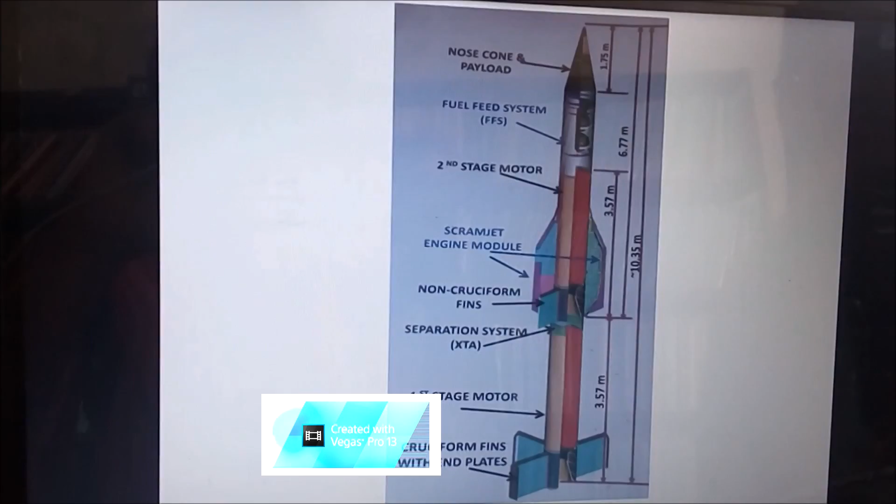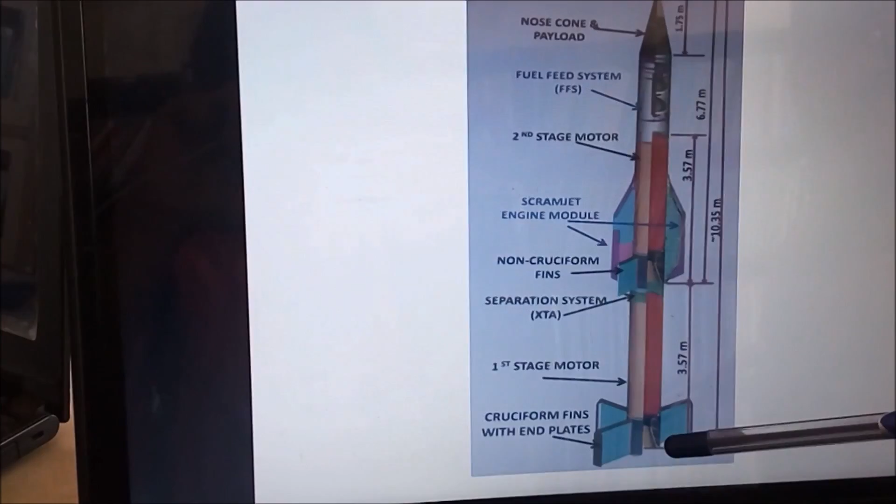The Advanced Technology Vehicle is a modified Indian sounding rocket developed by the Indian Space Research Organization. The first stage of ATV is called the booster and the second stage is the sustainer. Both the booster and the sustainer are provided with fins for aerodynamic stability. The fuel feed system is positioned above the sustainer motor, with the nose cone payload on top of the fuel feed system. The scramjet engines are mounted diametrically opposite at the end of the sustainer motor.

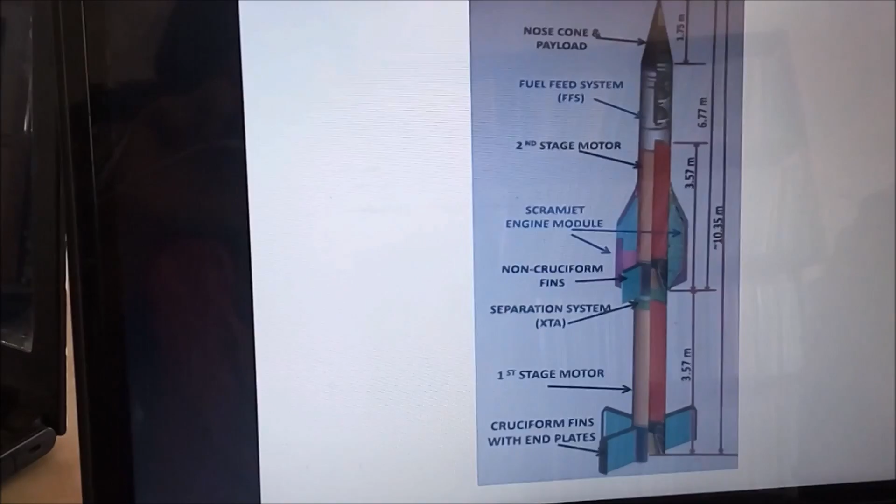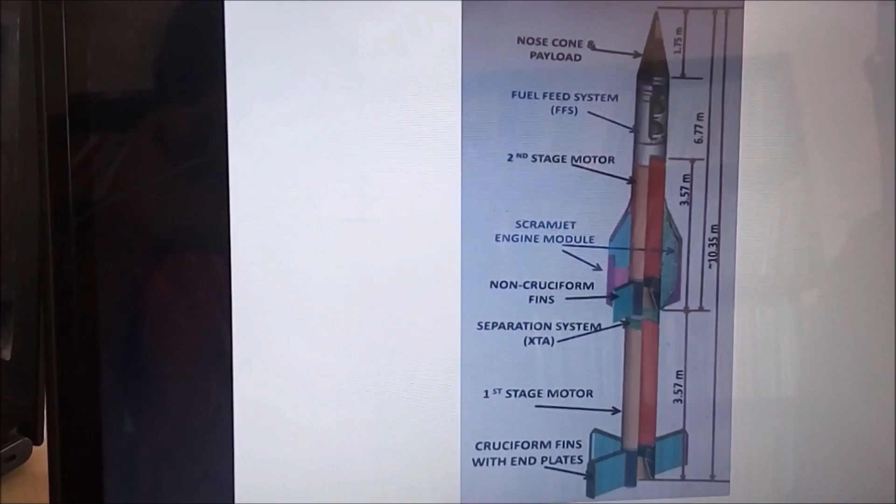Gaseous hydrogen has been chosen as the fuel for the scramjet engines. Air required for combustion is drawn from the atmosphere through the air intake system, and while passing through it is subjected to multiple oblique shocks which raise the pressure and temperature of the air. This facilitates auto-ignition of the gaseous fuel injected through the engine struts under choked flow conditions, into the hot air stream passing through the combustion chamber.

Even though auto-ignition of the fuel is expected to occur, as a redundancy, pilot igniters are also provided in the engines to ignite the air-fuel mixture in case auto-ignition does not happen.

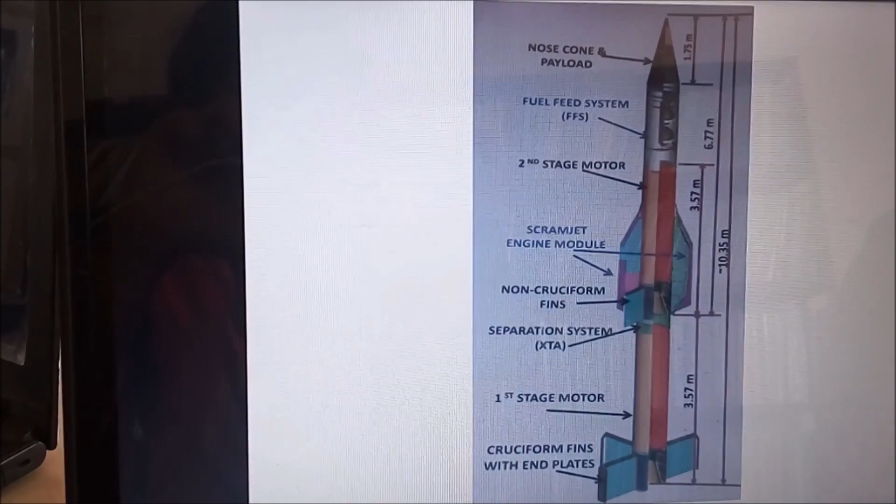The gaseous hydrogen feed system circuit consists of a gaseous hydrogen fill valve, used for charging the gas bottle to a pressure of 27.5 megapascals. A vent valve, similar in configuration to the fill valve, is used for venting the hydrogen gas in case of an emergency.

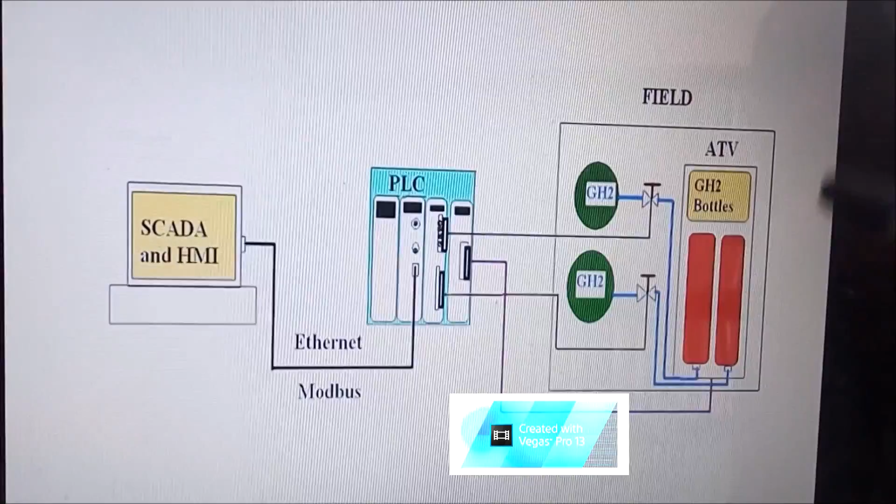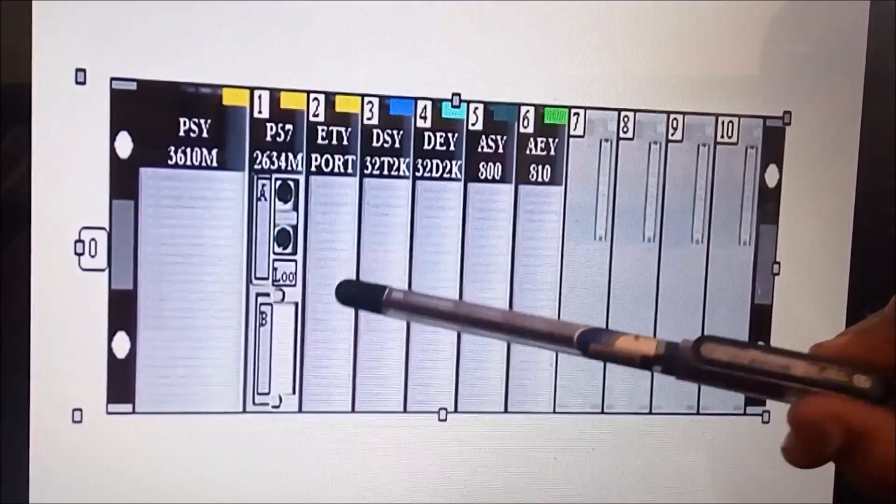This is the block diagram of our project. It consists of SCADA, PLC, and field equipment. The PLC used here is a Schneider Premium PLC. The hardware part of the PLC consists of a power supply, CPU, analog input card, analog output card, discrete input card, and discrete output card. All these components are inserted on a backplane.

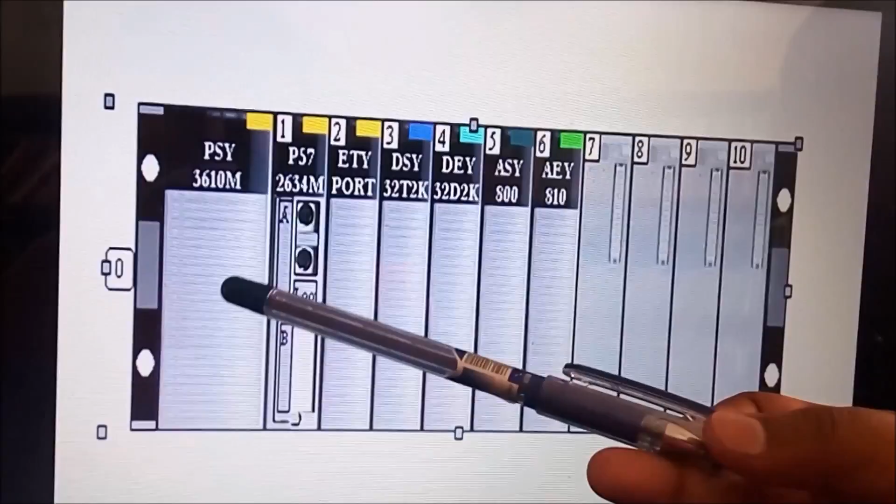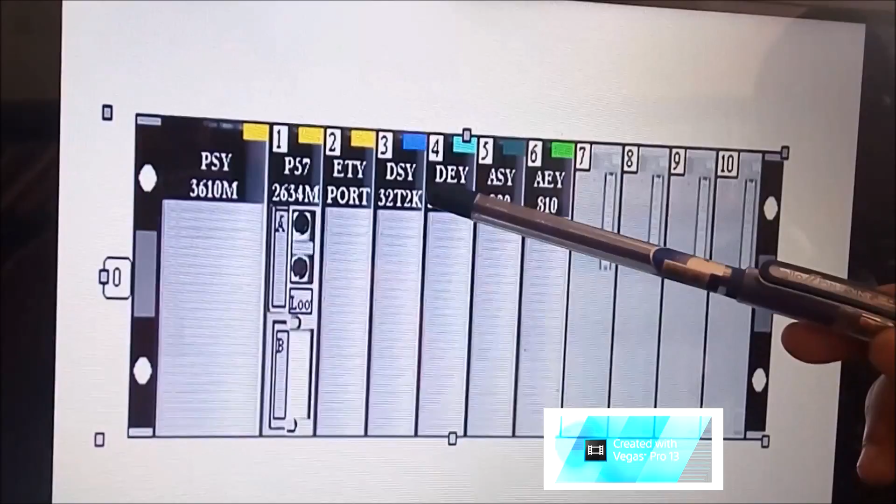PSY3610M is the power supply port, which uses a power supply of 24 volts. P572634M is the CPU. ETY port is the Ethernet port. DSY32T2K is the discrete output port. DEY32D2K is the discrete input port. ASY800 is the analog output port. AEY810 is the analog input port.

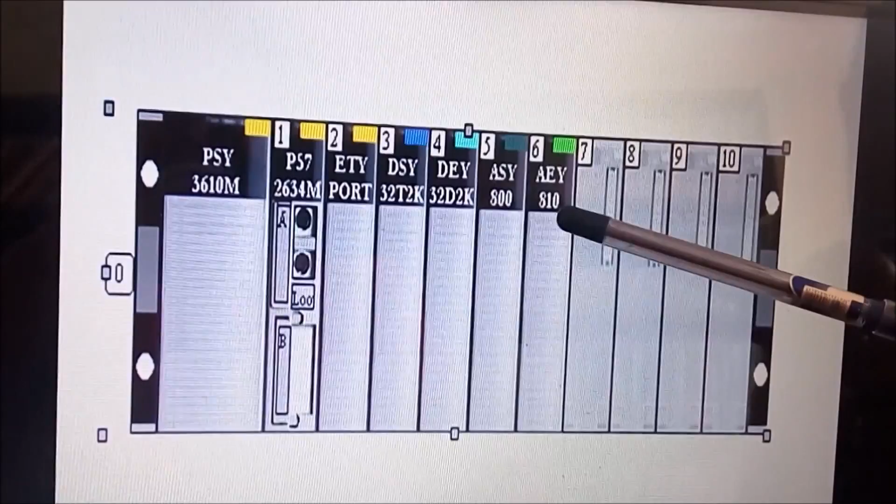What is a PLC? A PLC is an industrial computer that monitors inputs, makes decisions based on its program, and controls outputs to automate a process or machine. A PLC has a built-in operating system, highly specialized to handle incoming events in real time, at the moment of their occurrence.

There are many controllers for automation, but we opt for PLC because it is a digital computer designed for multiple input and output arrangements, for extended temperature ranges, immunity to electrical noise, resistance to vibration, and above all it can work under harsh conditions.

SCADA is an acronym for Supervisory Control and Data Acquisition. It is a real-time industrial process control system used to centrally monitor and control remote or local industrial equipment such as motors, valves, pumps, relays, etc. A SCADA system gathers information, such as where a leak on a pipeline has occurred, transfers the information back to a central site, then alerts the home station that a leak has occurred, carrying out necessary analysis and control such as determining if the leak is critical, and displaying the information in a logical and organized fashion.

We use Vijeo Citect software for SCADA, which manages and monitors the process in manufacturing, primary production, utilities delivery, and facilities management.

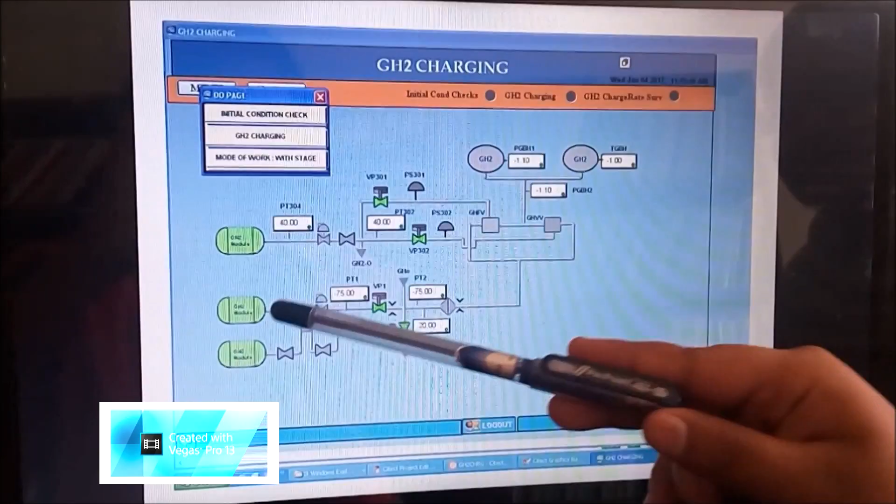This is our simulation result. This is the two GH2 modules, which store the hydrogen gas initially, and this is a GN2 module, which stores the nitrogen gas. These two represent the GH2 gas bottles which have to be filled, which is the main aim of our project.

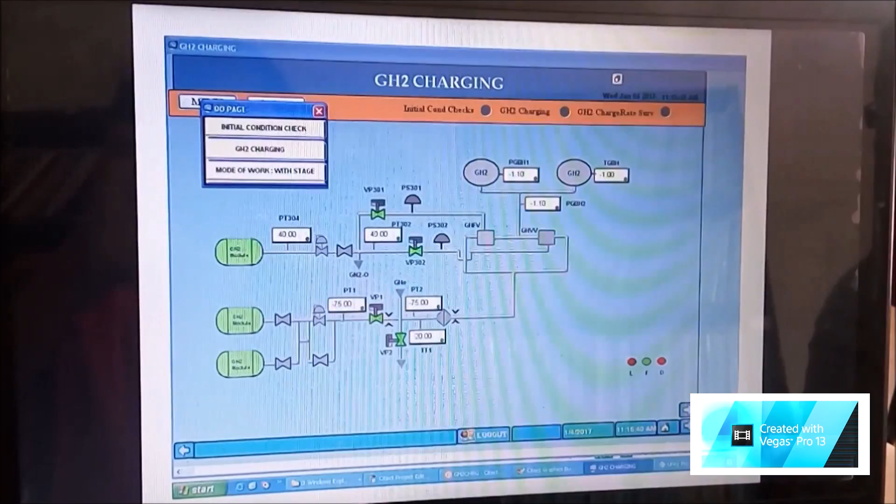These represent the valves, which are opened or closed based on the conditions. There are two types of valves: one is an electro-pneumatic valve and the other is a pneumatic valve. The electro-pneumatic valve operates using both electricity and pressure, whereas the pneumatic valve operates using only pressure.

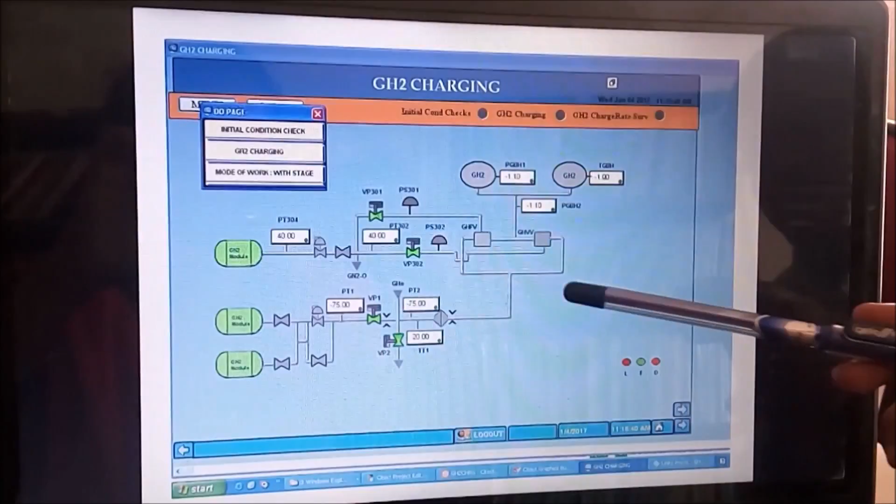It has GHFV, the gaseous hydrogen fill valve, used to fill the gaseous hydrogen bottles, and GHVV, the gaseous hydrogen vent valve, used to discharge the gaseous hydrogen when required. We use gaseous nitrogen to create pressure for operating the pneumatic and electro-pneumatic valves.

Now first we check the initial conditions. We check the pressure at terminal 1; it should be greater than 27.5 megapascals. If the pressure is greater than 27.5 megapascals, valve VP1 will open, otherwise it is closed.

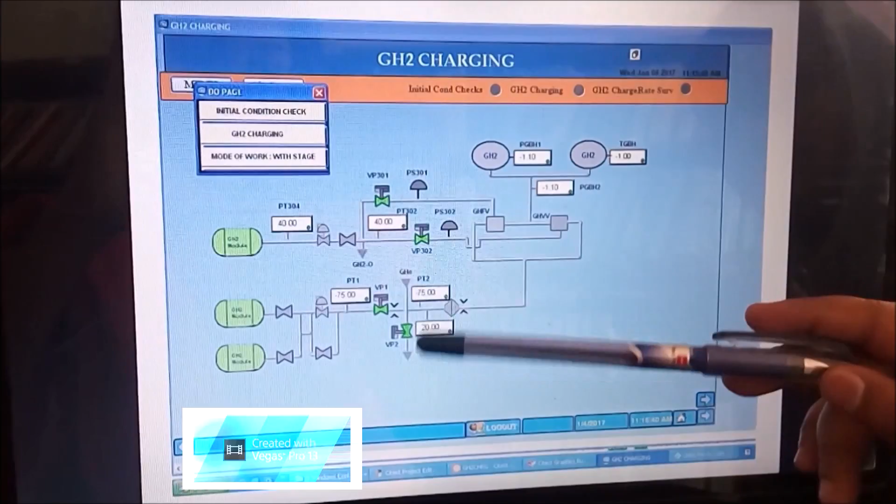After that, we check the pressure at terminal 2; it should be less than 1 megapascal. If it satisfies this condition, valve VP2 will be opened, otherwise it is closed.

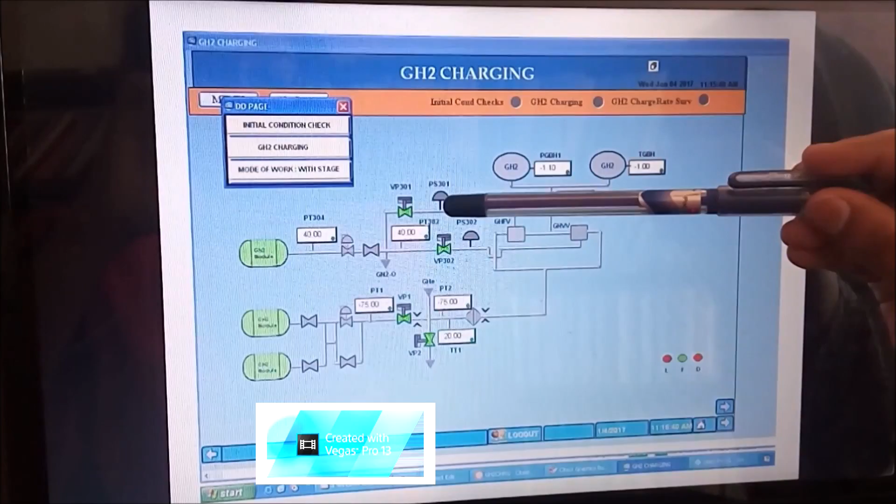Again, the pressure at terminals PT302 and PT304 is checked; it should be greater than 35 megapascals. If it satisfies this condition, valves VP301 and VP302 will open.

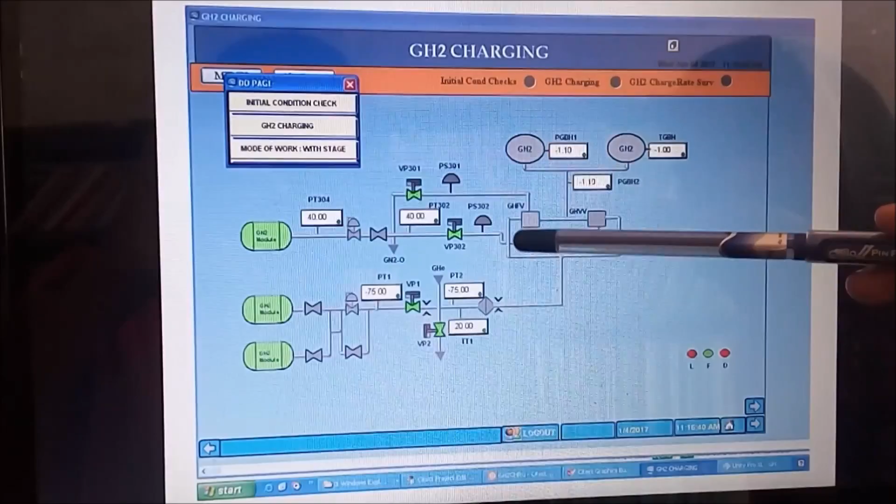To charge the GH2 bottles, only valve VP301 should be opened, to create pressure via the GN2 module for opening the gaseous hydrogen fill valve. Valve VP302 remains closed to keep the gaseous hydrogen vent valve closed. The gaseous hydrogen vent valve will only open for discharging the gaseous hydrogen from the GH2 bottles when required.

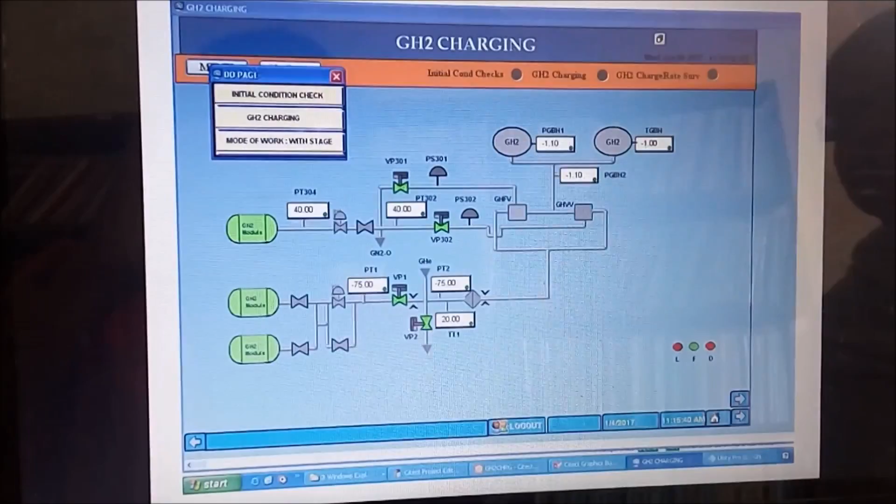If all these conditions are satisfied, the GH2 bottles start charging. During charging, it also checks the charge rate surveillance and temperature. Charge rate surveillance is the rate of charging of GH2 bottles, and it should be greater than 2 bar per minute. The temperature of the GH2 bottles should be greater than 45 degrees.

If these two conditions are satisfied, the GH2 bottles keep charging; otherwise, it closes the VP1 valve and stops charging. Thus, we automated the process of GH2 charging of gas bottles. Thank you.